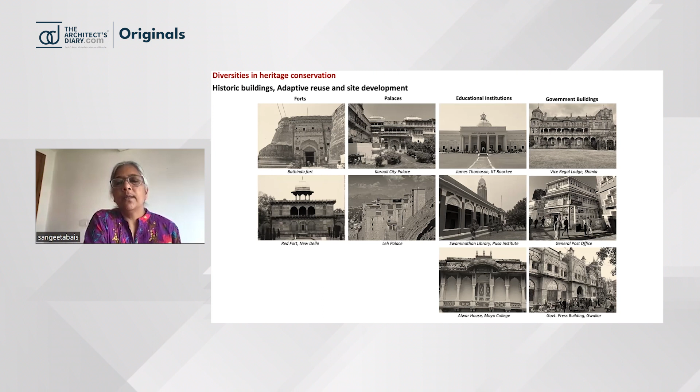Other buildings like Vice-Regal Lodge, General Post Office, and Government Press Building are all-building-oriented projects, bound to their own immediate context setting. Beyond that, nowadays heritage conservation professionals are involved in much more.

For example, we are involved at the moment in working for religious tourism. Dharohar actually picked this up from the rejuvenation of Ajmer Sharif Dargah, Kaila Devi Temple, and the Mahakal Corridor, which is recently completed.

Street facade upgradation is another wide-ranging and upcoming field, where the contribution of heritage professionals needs to be there with a sensible approach, looking at sustainability and community requirements. There we deal with heritage, community, modern needs, and modern bazaars — we need to integrate all these things together.

Also, heritage conservation professionals play a very important role in preparing city vision plans. Now, most states are preparing their tourism master plans and city vision plans, so that every district can promote their arts, crafts, and heritage in a sensible manner, integrating other factors, along with site development programs.

We are working in the Leh-Kargil district, which comes from a different cultural background and a different geographical and topographical setting. So all this variety comes from different perspectives, and we ourselves often face problems when new projects come — what project to refer to as a base — since we don't find any reference for that.

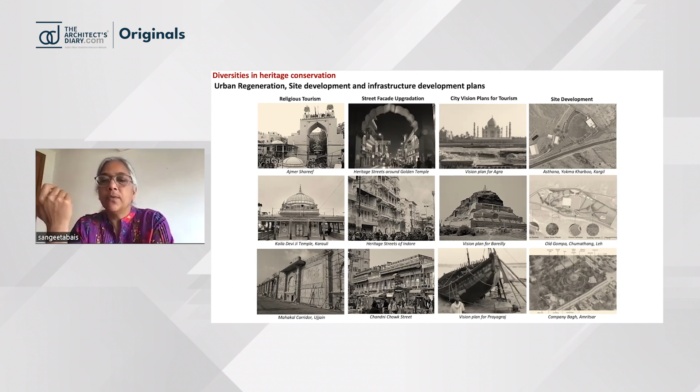That's how things come up with time. Heritage conservation is not only limited to the building you're conserving, you also gain knowledge about the building material, construction technique, and its sustainability over time.

This knowledge system also helps architects build new structures sustainably, integrating original historical and traditional building materials with modern conservation materials, and efficiently designing for people while incorporating modern needs.

In preserving, you need to look at the existing site and promote local material techniques so transportation costs are reduced. Energy efficiency responsiveness is required, and renewable energy resources need to be considered in heritage conservation as well as modern construction.

Water conservation is a prime need, dealt with at both building level and site level. We combine all these things in different projects, and nowadays it's not only architects and conservation architects, but diversified experts working on heritage conservation projects of different nature.

There's also another diversity in heritage conservation. We need people who can do good research in various aspects like history, material, construction, climatology, sustainability, user patterns, evolution patterns and influences, so we can derive a good conservation strategy for any heritage project.

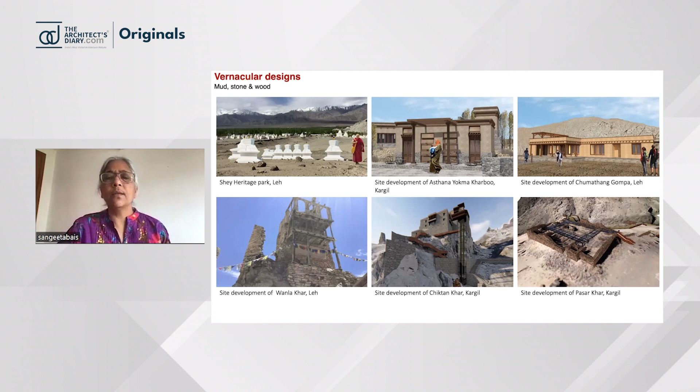This is the way we understand Kargil - we understand Kargil from the Kargil War. But Kargil is not only the Kargil War. It has its own culture, its own evolution history, which is extremely significant. So we are trying to get into that perspective and trying to establish various historic sites and tourist sites, bringing them into a very good interpretation mode.

One example is Kargil - this is Chiktan Khar, close to Kargil. It takes a 3-hour drive, and it is on the hilltop.

This is a very significant fort in the history of Leh and Kargil. It is a precursor to Leh, and it also set the language for several upcoming khars - khars means fort. Previous to that there's a Pasar Khar, and it also shows a very important history about Buddhism, Hinduism, and Islam. So when we see this site, it really tells a lot of things.

The ruler of this place had invited an artisan, Chandan, from Baltistan, who constructed this fort. Now the vision is to reconstruct this fort to its original form and adaptively reuse it as a museum to showcase Chiktan's cultural diversity and history, so that people coming there are not only coming for biking, but also for some knowledge and variety.

So we have done extensive study of this from archaeological, historical, and material perspectives. Fortunately, we got one image - there are 3 images we got of this palace. Based on that and based on the archaeological evidences, we could establish the overall model.

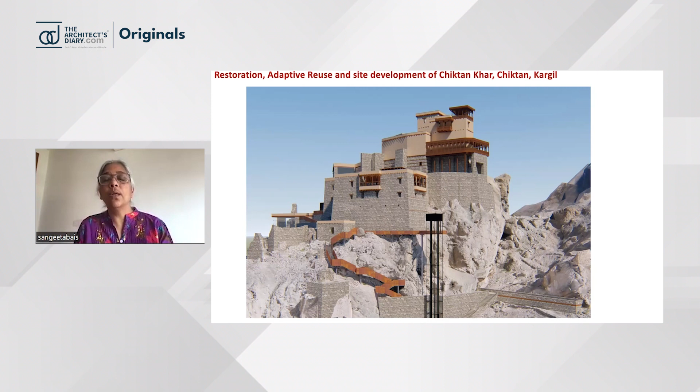So we need to establish a new approach so that tourists can easily go up to the top of the fort. This is a 7-layer structure of the building, because on the hill we find 7 different levels. If you see this structure, it was originally a 7-story tower, and this was the king's chamber also.

As per archival records, it is one of the revolving towers, constructed with wood, which could not function because of the conflict between the king and the craftsmen—the king didn't want him to construct any more such forts. So there is some oral history and tradition that he had removed important needles so that it could not revolve.

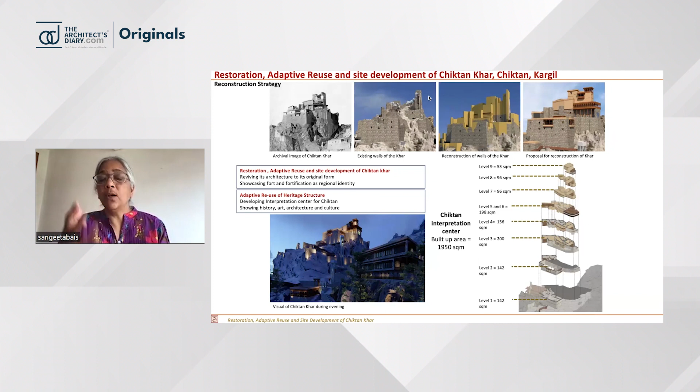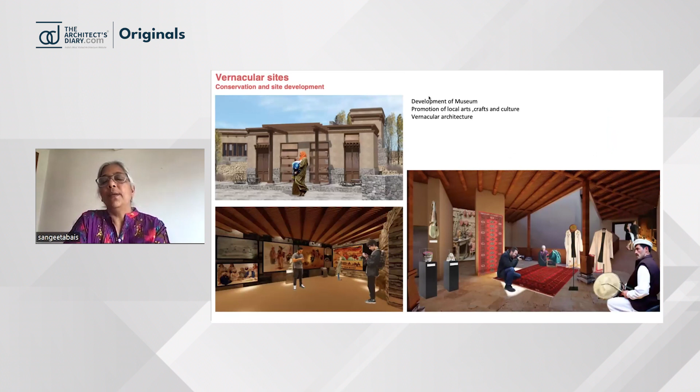That story happened, but we did the study and are creating interpretation panels to showcase that the technology was already there. That's how this restoration work will happen. In the interior, we are creating a Chiktan interpretation center, depicting the story from the prehistoric time period to modern days.

Another example of different scale and variety is the barrack in Red Fort. We got this building in this form and the project was already awarded. This was the Adopt a Monument scheme done by Dalmia, and another consultant was hired for that. At some point you're at a stage where you get an opportunity and you just want to work on it.

After the conceptualization, they realized it had to be conserved. I was called, and there was a different version of the financial plan. It can be done in this much rupees—but we assessed the building and the cost automatically reached almost double, because when you're making an interpretation center, you're hosting 500 people daily.

You need roof stabilization, you need to make the building fit. The building had multiple divisions, alterations, severe damage because it was used as a barrack, and the whole facade was changed.

So we started working on that, and we prepared how the building should look and how it originally was, because several types of old material were used when different buildings were destroyed after 1857, and these materials were used to construct this barrack. But this was not easily accepted by anyone, because other barracks were already constructed using this color system. Still, we said, okay, just start it.

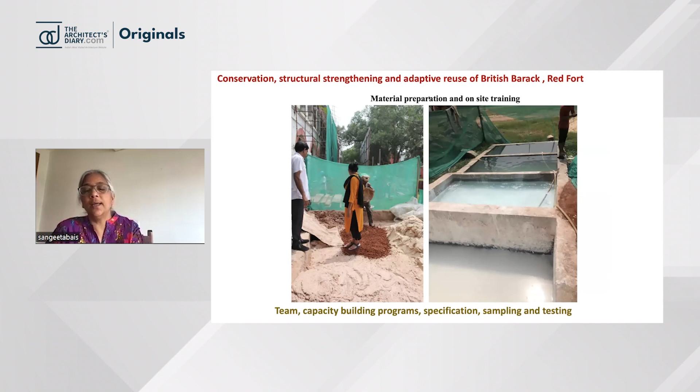So that whole process started because of the contractor who was hired, who was the interior contractor—training them, bringing out the work, doing structural investigation, taking all the structural safety measures. Now grouting was a big challenge because structural safety was required, and it was COVID time too, so we needed to prepare all the grout on site.

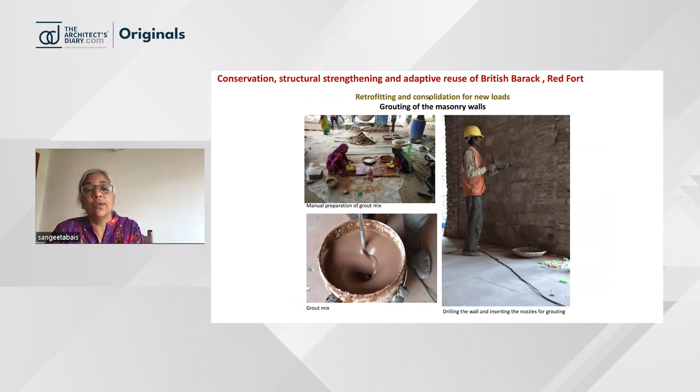We could not import anything. And again, doing testing to see how much the wall had attained strength—fortunately, we could really do good experimentation and good grouting work with the team. That's how the building started transforming, with multiple divisions and divided roofs, and it started looking good.

Now, this was a challenge for me—there were small T sections and stone panels. This is the place where we intervened in a different way: we had to provide reinforcement and connection with the walls so it can take the load and doesn't vibrate while people are walking on it. That's how the building was transformed over time, and now it is an interpretation center of Red Fort.

That's how the building looks. It is one of the most visited sites in the Red Fort complex at the moment.

Another example I will go through quickly is Maharajwada. I worked with Ujjain Smart City on this project. I had prepared the DPR, visualized it, and then it was tendered. I visited almost a year after the tendering was done and work had started, and when I first saw the building, no one was thinking about it.

It can be a very important heritage building. It doesn't have the very common features of that time period, the 1930s. So it is very important to create interest among the people and show its significance, beauty-wise and aesthetic-wise.

We did all the investigations, small excavations and detailing, and started preparing how the building would look - the exposed brick features, the exposed stonework, how the interior looked. It went okay, but no one visualized how the building would actually look. That visualization didn't come out in people's minds.

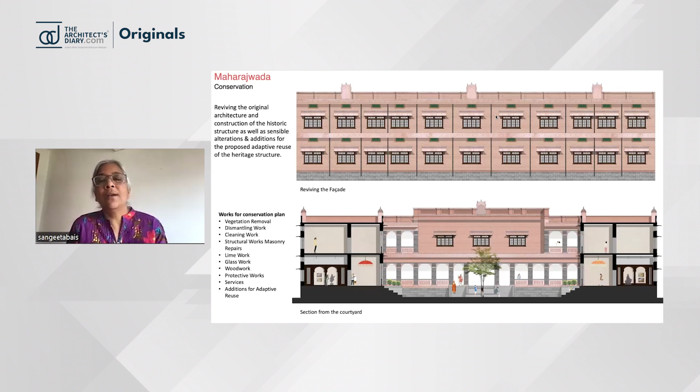When we started removing the lime wash, it started looking like the vada. This is a Maratha vada with exposed basalt stone, gray stone, and red stone jalis, and the building really achieved its beauty. It's one of the most beautiful buildings, and everyone is just loving the combination that is coming out. Everything is now getting its final shape. That's how reviving the aesthetic beauty of buildings is also very important.

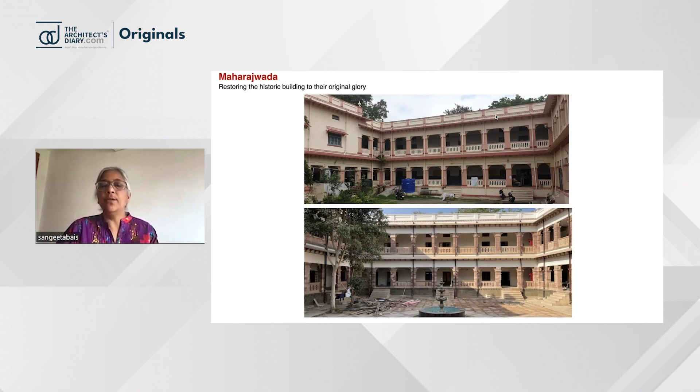Sometimes you achieve the aesthetic, but it's not feasible to keep it as-is in the present day - you need to work out alternate solutions, because this building is going to be converted into a hotel. There are some restrictions, but we could achieve most of it. The interior will be a complete new system. That's how the building has transformed, and all the layers are working pretty well. The designs are now visible - people didn't believe it could be so beautiful.

Another example is the Mahakal Dwaar, one of the surviving gateways of the Mahakal complex city. It is a combination of different materials. Several buildings and walls were constructed using old materials from the temples. You can see on both sides the walls, which are in very bad condition, with a small RCC bridge connecting both sides.

On the right-hand side of the same building I showed you, Maharajwada, the other side is a police station, and it has dense vegetation. You can see trees here and here, and it was proposed that we should demolish and cut the tree. We opposed it and did a horticulture study, which showed we cannot remove the tree - it would die. So we made changes in the design so that the tree could survive, and the structure could also survive.

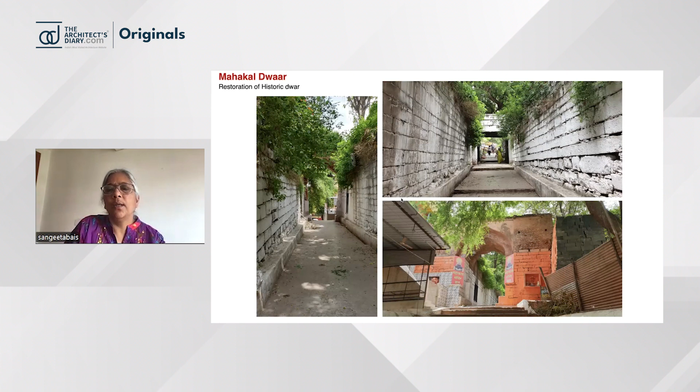All the cleaning work was done, walls were reconstructed, and partial structural strengthening was done - that's how the structure was created so the tree could survive. We supported this tree for months with additional support while the complete root system developed so it could grow toward the other side and have structural strength there, so it doesn't collapse during heavy rains. It's one of the good places now - people started using this lane, and it was executed by Ujjain Smart City, one of the important projects of the city.

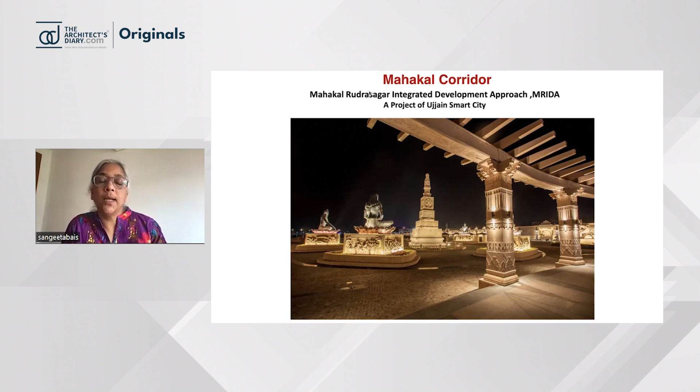Another role we are doing nowadays is using the knowledge we gain, because when you do conservation, you learn a certain kind of research work, and we try to use that sensibly at this level of project. This is the Ujjain Mahakal corridor, where I was responsible for developing the art language and the complete sculpture work as per the knowledge system - that's the Saptarishi Mandal, depicting all the Saptarishi and working out their stories, so that visitors can understand those stories and how they are depicted.

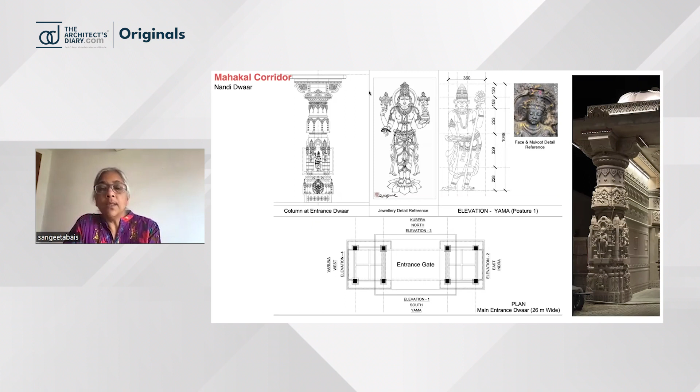This is the Nandi Dwaar, designed by us considering all the factors, which gives the entry to the major Mahakal temple. This is a complete new structure. The problem was that when we entered, the project had already started and the stonework was not coming out in proper shape. So we started working on that - we worked with artisans for months, almost 2 years, and worked out all the details.

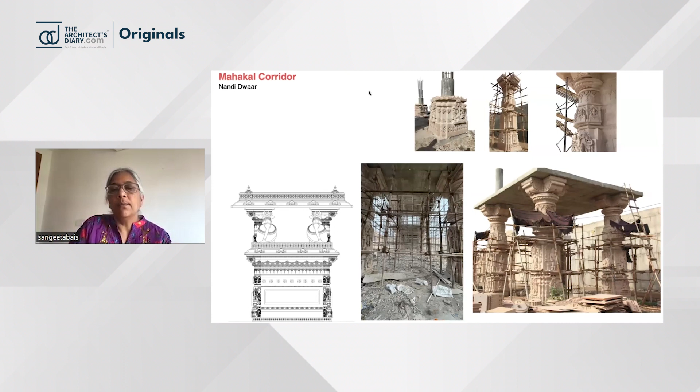It started from tracing the pattern, transferring to the stone, and bringing out each and every expression—all jewelry design, all hand expression, how the pose should be, what specific detail belongs to that devta—all those things were done. That's how the complete model was developed. This is one example, the complete elephant panel leading towards the temple.

Designing and working with artisans is also not easy. We say artisans are good, but nowadays the kind of work they're getting is not what we're asking of them. They want all the elephants to be the same, all the panels the same. No, they will not be the same—it is a procession, they are not doing a parade. So convincing them to do different things, that is also difficult.

First, he made all the elephants going away from the Mahakal. Then we forced them—no, it has to go towards Mahakal. So that's kind of a struggle, but it's okay. That is the job, and we need to really work out together so that they are also happy, understanding sequentially and working for this.

The biggest challenge for us as conservation professionals is one of the biggest Shiv Vivaha panels. This is a 100-feet panel without any break, depicting the story of Shiva. The procession starts from Kailash to Parvati Mahal, and the baraat is going back to Kailash—that's how the continuous story was created.

After that, it was depicted on the stone, depicting each and every story and character presented in the Shiva Vivaha, which we sourced from different Puranas and different mythological resources.

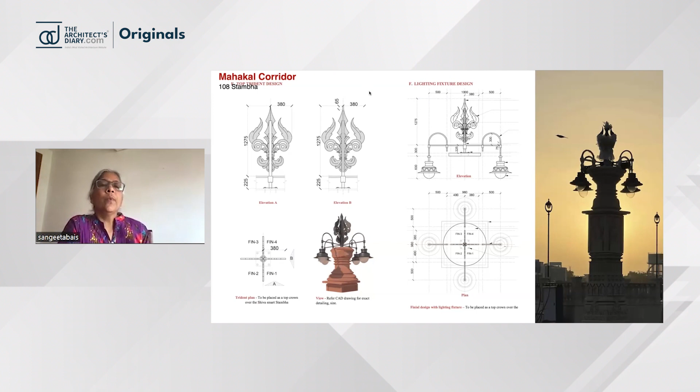That's how this element was designed, and the first several sampling processes were done. Ultimately, it looks stunning at the moment.

Then convincing them to at least start removing the color, bring the beauty back. After this effort, they did one cleaning by themselves of the Akbari mosque, and they could reveal the historical glaze style patterns. I was super happy.

They themselves told me, 'Ma'am, success'—we understood that it is not just about beauty. Adding layers and layers and layers is also not good for the building material. Your core structure holds the dampness, creates algae, vegetation, lichens—it really accelerates the deterioration process.